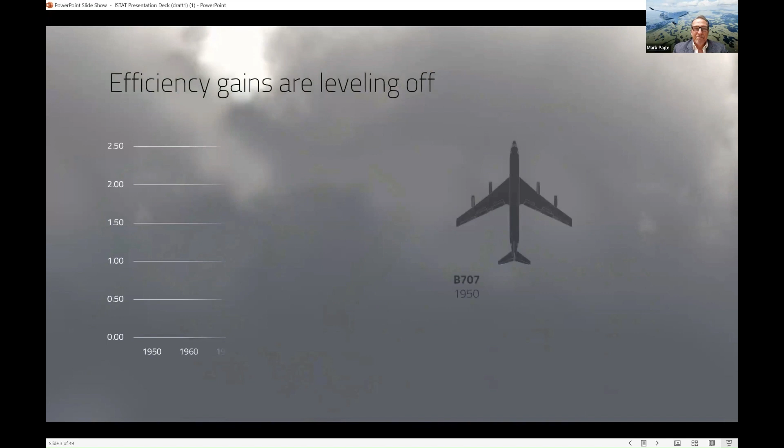But the preamble is this: the aviation industry has been doing a great job reducing fuel consumption over the decades. The interesting bit is that if you go back to 1950 and look at the 707, the first biggest successful program right after the de Havilland Comet, which was the first jet airliner, this species was formed: swept wings, podded nacelles, cylindrical fuselage, and an empennage. As you see, over time, that hasn't changed. The species of the airplane hasn't changed. Most of the benefits you see on the left were actually engine-related benefits.

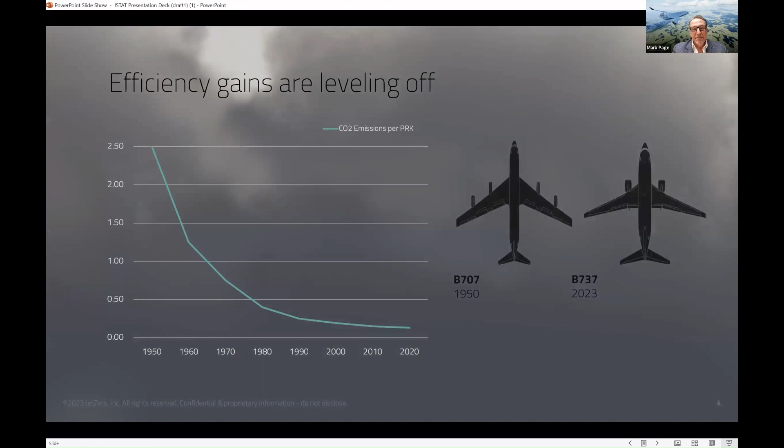So what can we do? Well, we have a proposition with this airplane to achieve a 50% reduction in energy consumption, and that goes along with a 50% reduction in CO2 and water vapor products as well. 50% is a bold statement. That is saying a lot. Hopefully you will see, as we share some of this work, why we feel so bullish about the technology, why the folks at NASA and the Air Force, after vetting our work, also see these benefits in the future.

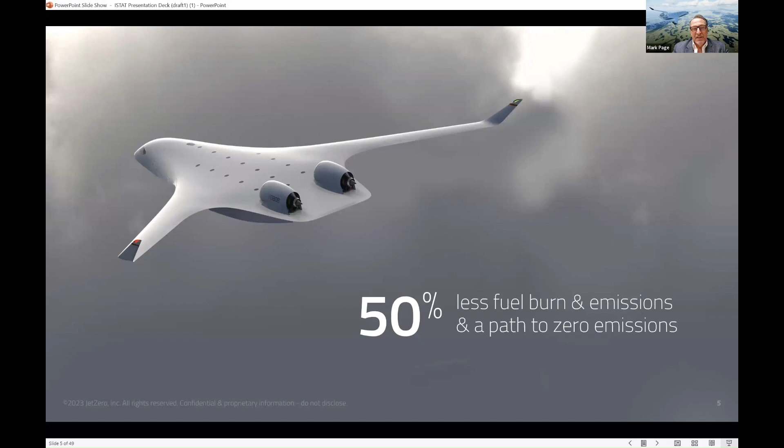And I'll start with talking about the structure of the airplane. Let's look at a tube and wing. On the top, I'm showing the lift carried by the airplane. On the bottom, I'm showing the weight distribution. If the blue and the yellow were equal and opposite, wingtip to wingtip, then in theory, you don't need structure. Everything will stay in its place.

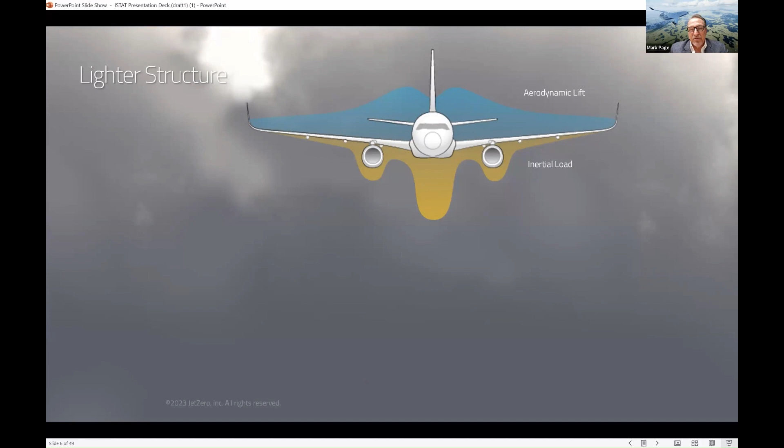Of course, you do need structure because those shapes change over time. But nonetheless, the amount of structure I need depends on how dissimilar those shapes are. Any place where the weight is concentrated and the lift isn't lifting it and canceling it is going to make big structural bending moments, as we call them, and shear stress. That results in the need for thick skins in the wings and big webs.

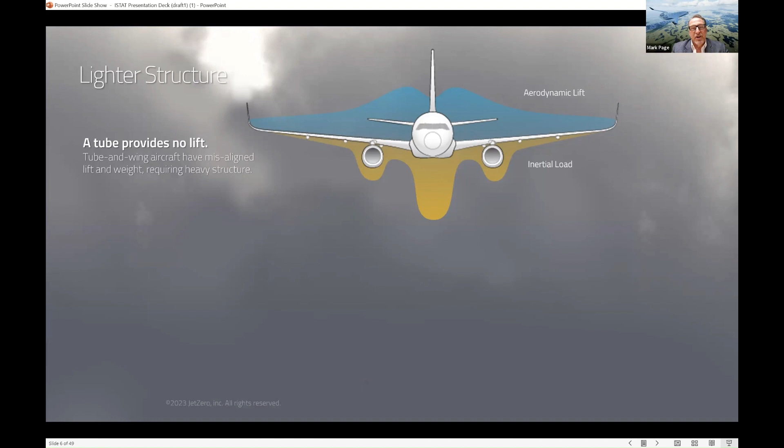The airplane, of course, with the tube and wing, there's some carryover lift on the fuselage, but the fuselage itself doesn't make lift, so it distorts the shape of the lift distribution. The blended wing solves that by simply being a continuous airfoil from wingtip to wingtip, and we also distribute the mass in a very favorable way. When we do that, the stresses on the airframe from wingtip to the middle are much reduced, and the airframe can be very, very light.

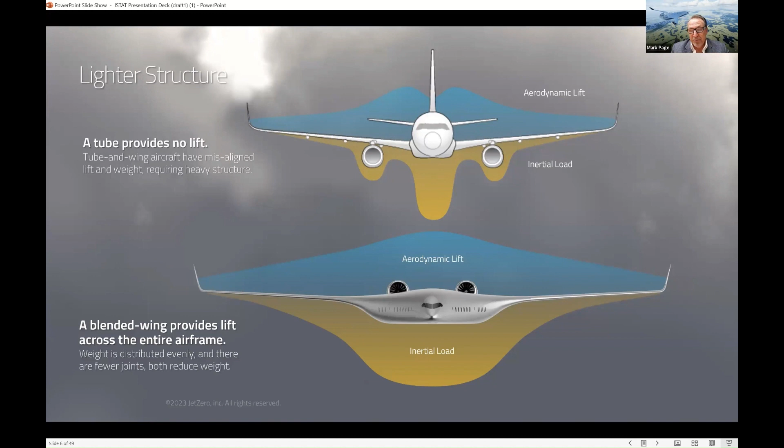But there's another part to the blended wing story. If I look at a tube and wing airplane above, clearly the fuselage carries the passengers, the engines make the thrust, the tail keeps it stable. Why does the tail keep it stable? Because cylindrical bodies are profoundly unstable. That's a huge disadvantage of tube and wing airplanes - they need a giant empennage to compensate.

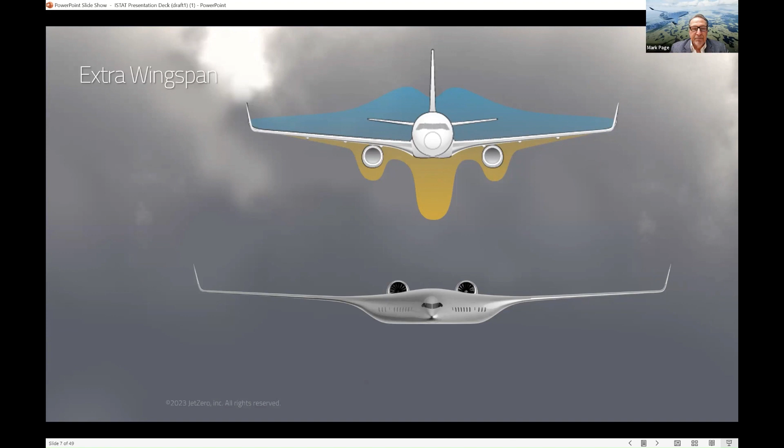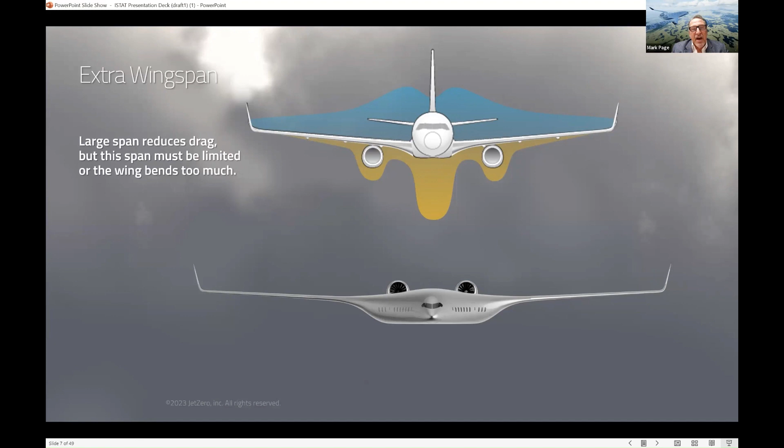Nonetheless, the airplane we've evolved has been a very successful configuration, a very successful species. One thing you'll notice is I've got rather slender wings and a big, deep fuselage. That wing's slenderness is limited - I can't just make it longer and skinnier forever because it flexes too much. It becomes not a strength problem, but a stiffness problem. So the outer wings on airplanes today have gotten about as long and skinny as they can get.

What the blended wing does is change the fuselage into a lifting shape to continue that lift from wingtip to wingtip, pushing those slender wings further outward. Now I have significantly less drag due to lift.

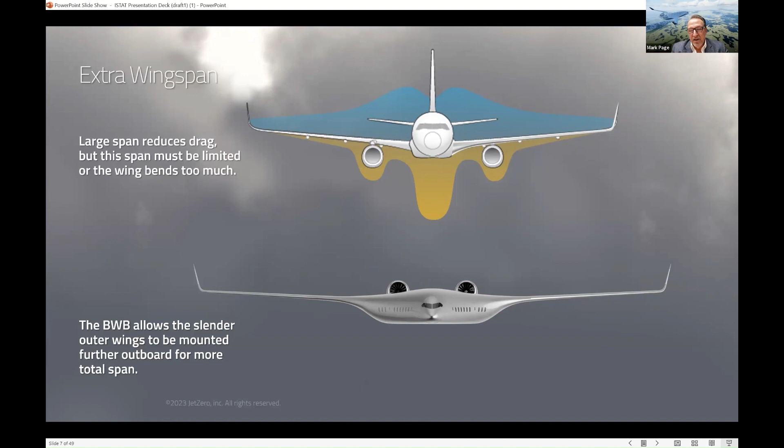The interesting thing about this market space, as most of you are extremely familiar with - if I looked at the worldwide global fleet and plot that against the capacity of that global fleet in seating, you get a really interesting curve. Dark blue is single aisle aircraft, the lighter blue are twin aisle aircraft, and you've got this interesting discontinuity somewhere around 170, 180 passengers.

What's going on? Well, the first thing that has to be said is in the middle there, those airplanes are in the process of vanishing. 757s, A300s, 767s - those airplanes and airplanes in that passenger capacity range haven't been introduced as new aircraft for decades. And so it's created what we call the mid-market gap. The airplanes still in the fleet today will soon be gone in that area, around 210 passengers or so on the other side.

So that is the so-called mid-market gap, and it's created this giant spike in demand for everyone trying to get in. Everyone's buying the beachfront property, but they can't get into the pool. That's the gap that we intend to address, and we believe that demand is going to be extremely high once that market gets served again.

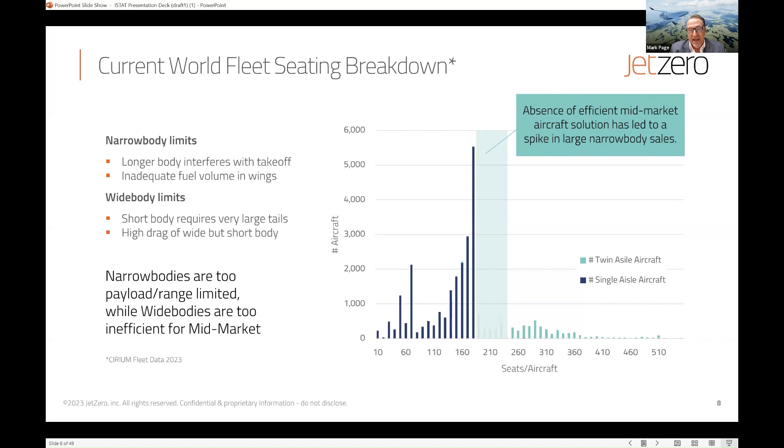But as you know, the mid-market gap presents a couple of real challenging problems. One of them is that since no one's been working on new aircraft for that segment, no one's also been working on engines in that segment.

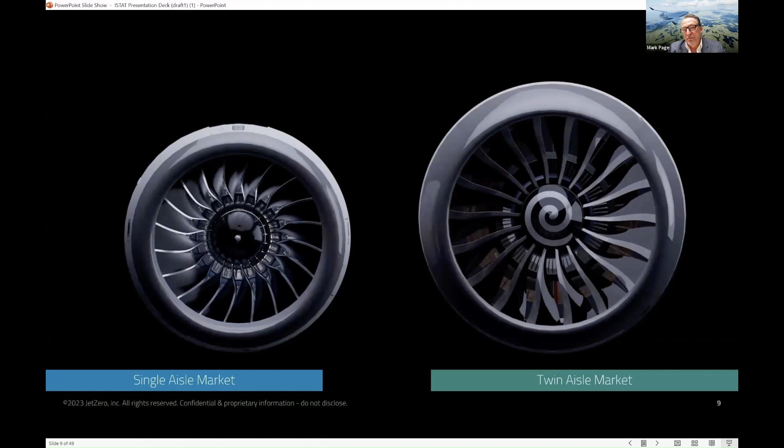So we have on the left a traditional narrow body engine - maybe it gets up to 34,000 pounds of static thrust. On the right, the next closest engine is about twice that thrust - a modern engine available today is about 64,000 pounds of thrust. There's a gap in the engines too, and that has been a barrier to the OEMs introducing the so-called mid-market airplane. They would have to make a new airplane and a new engine.

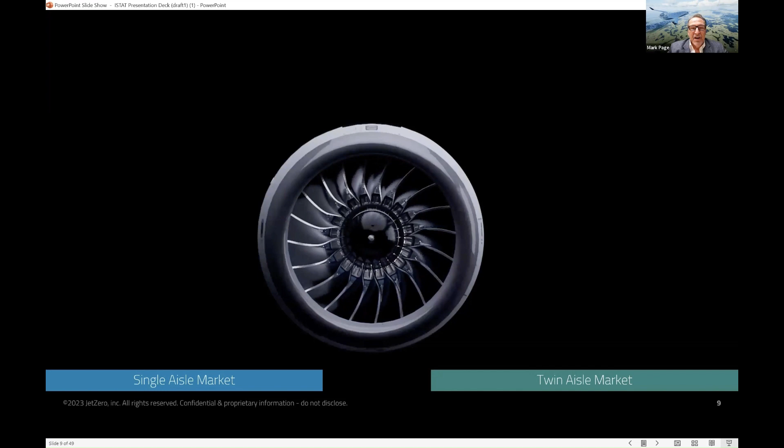What we've done with the efficiency of the blended wing, we've reduced the demand on the engine to about half of what it would be for a mid-market airplane that's a tube and wing aircraft. When that happens, suddenly the advanced LEAP and Pratt & Whitney GTF engines are perfect fits for this mid-market mission, and that problem is now gone away. I can have off-the-shelf engines that are mature and getting even more mature, available to serve that market. That's a big change in what it means to the world.

The airplane is going to be very conventional in some ways - in other words, how it fits into the market, it's going to fill in space that's been long empty, but it's just an airplane. It flies around 0.8 to 0.84 Mach, it's going to have typical mid-market ranges and typical mid-market capacities. When a pilot jumps into it, strangely enough, though it looks different, it'll be very familiar - the displays, the controls, the procedures are all going to be the same. Jetways, ground equipment, all that stuff will be the same.

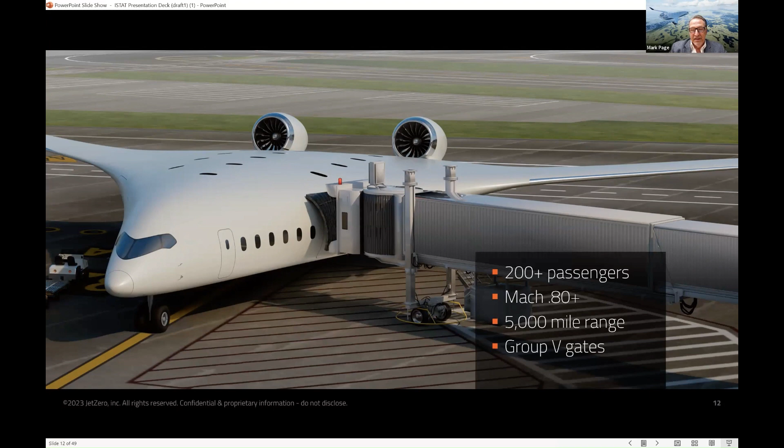So when we bring an airplane like this to the market, what do we think passengers are going to say? What's going to be the reaction? We've been working this for a long, long time.

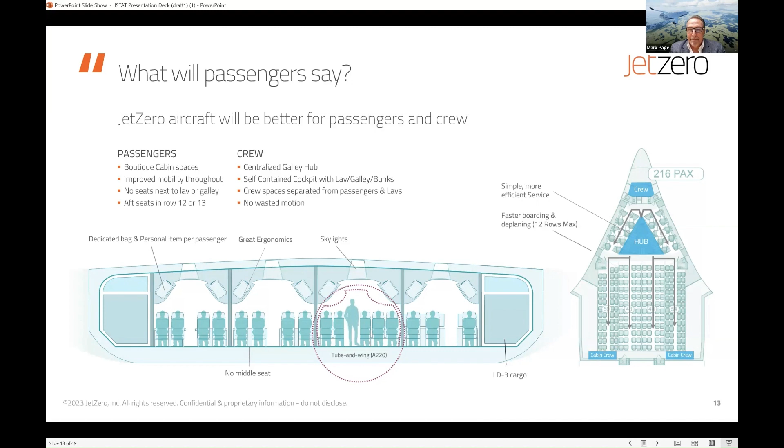We often get questions about emergency egress, and that's a great question to ask. We have 6 major exit doors on the airplane at the top, very much like a competing tube and wing aircraft. Most tube and wing aircraft also have perhaps 2 doors over wing. We don't need over wing, so all the doors, everyone will exit the airplane without having to climb up and climb through a window. Every exit is a door.

Because we have such a short main cabin, look at that, it's only 12 seats long. That means the time it takes to load, unload, or make an emergency evacuation of the airplane is much reduced. Everything you can measure related to how people move around in airplanes - average boarding distance, how many seat crossings, which are the things that slow you down, and how far am I from the emergency exits - on average we have very significant improvements on all of those things.

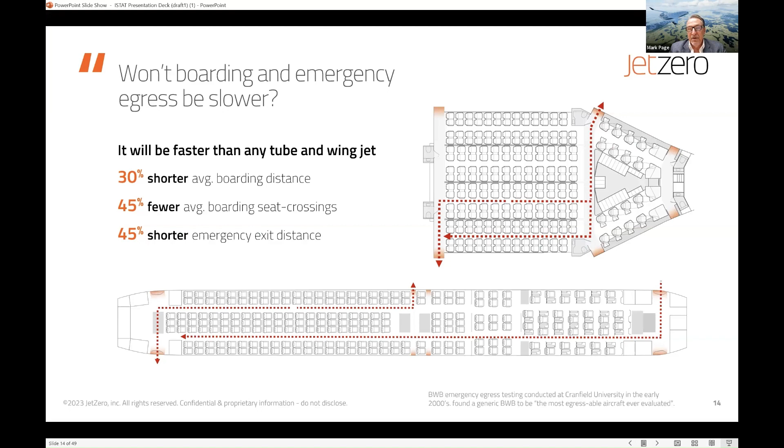Research in England with a full-size, much larger blended wing body concept declared it the most egress-able airplane ever tested by Cranfield University. So there's a lot to recommend the airplane in terms of emergency characteristics and qualities.

Let's dig a little deeper into this fuselage question and how the fuselage is constructed. If I look here, class leading A220, lovely interior, and I think it's the favored interior of all aircraft right now in ratings. We're, of course, doing something different.

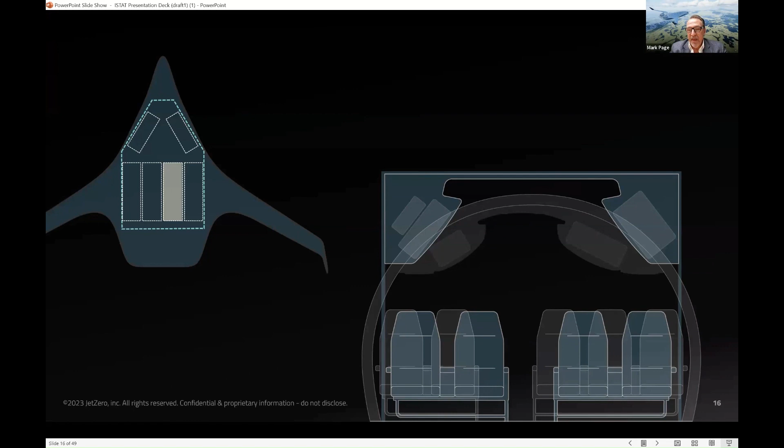We have vertical sidewalls. We're looking at a 4 abreast seating arrangement. Our ceiling is higher, and look how much further out and up I can put the luggage compartments. So now it's a clear way for you entering and leaving the airplane and putting your luggage up there, and for the staff on the airplane, it's a much more usable open space.

So the airplane - again, looking at the total cross-section of the airplane with these individual bays, 4 abreast seating. The beauty of this arrangement is that there are multiple benefits, but the vertical sidewalls allow us to add over 50% more overhead baggage volume.

Anything you bring aboard, there's room for. With the 4 abreast seating, we can actually assign half of the rack above your head to you and your seat number, and the other one to your partner there. Everyone gets a seat, a dedicated baggage storage space on the airplane, numbered to your seat.

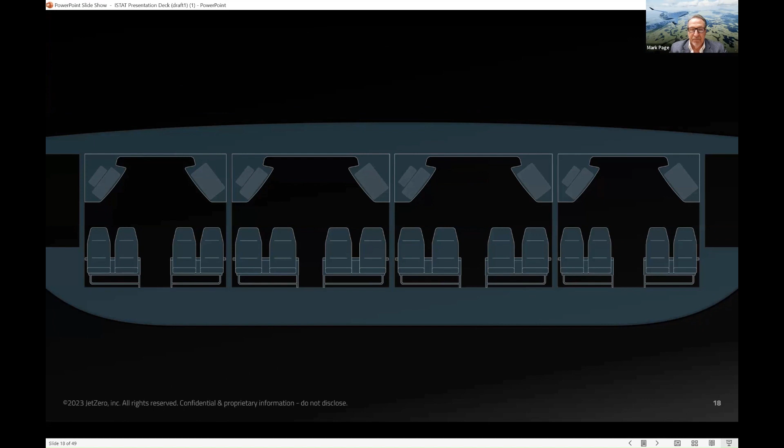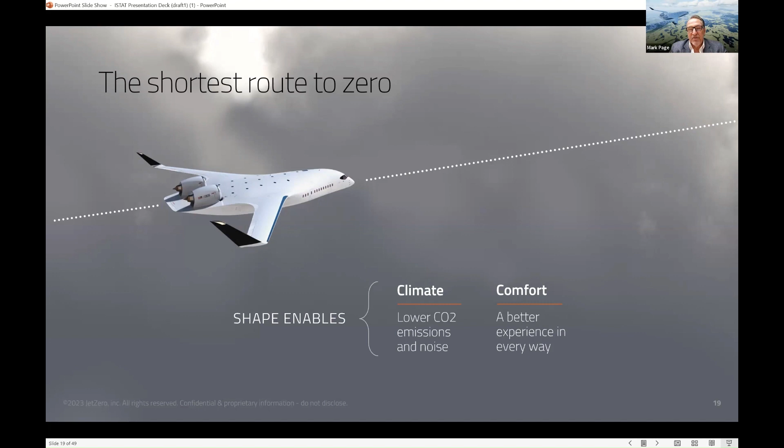So shape enables so much. This new species, this new shape of airplane is opening up not only things related to climate because of the efficiency of the airframe, and we'll talk more about how quiet the airplane is, but we're also going to be making a major step change in comfort because the sidewalls are vertical, the bag racks are much further from the seated passengers. They have much better head clearance, and they're very accessible from the center aisle. The 4 abreast cabins are wonderful, no middle seats.

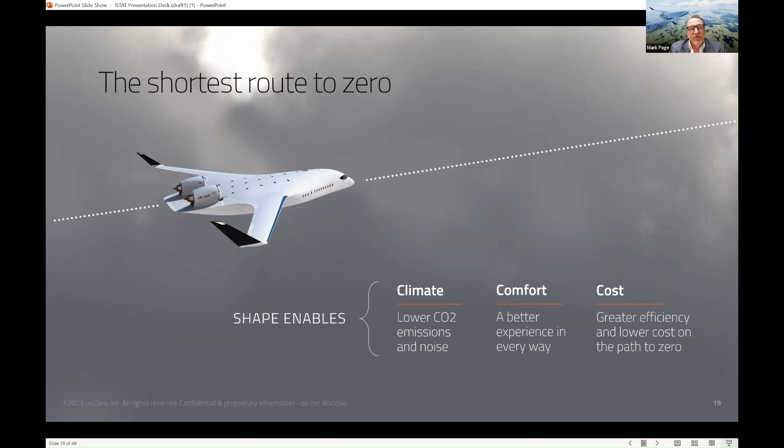In terms of operating cost for the airlines, this efficiency obviously is going to have a significant advantage. But not only that, we are providing a path to zero emissions with liquid hydrogen. This work has been studied, blended wings, for a long time. I was there at the birth of the modern blended wing.

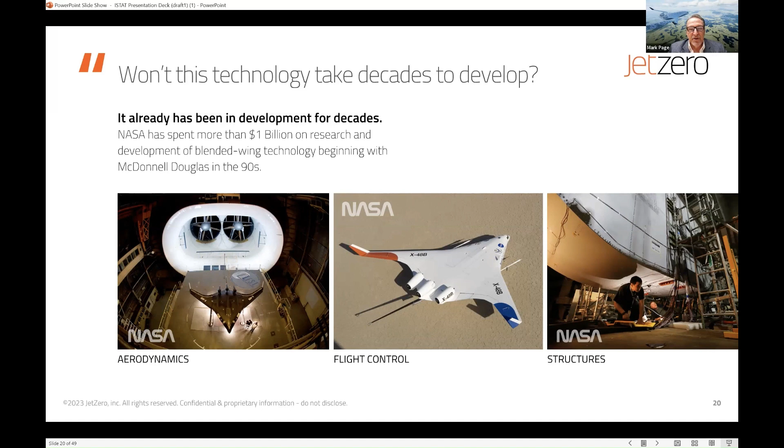Flying wings have been around a long time, but this isn't just a flying wing, it's a very different thing. There have been other antecedents that presaged where this was going, but the actual blended wing we're talking about was created in 1990 by the folks here. Bob Liebeck was the first person to pen the general concept of having a concentrated payload compartment, not more so fore and aft but widened, and what that could offer to the airplane.

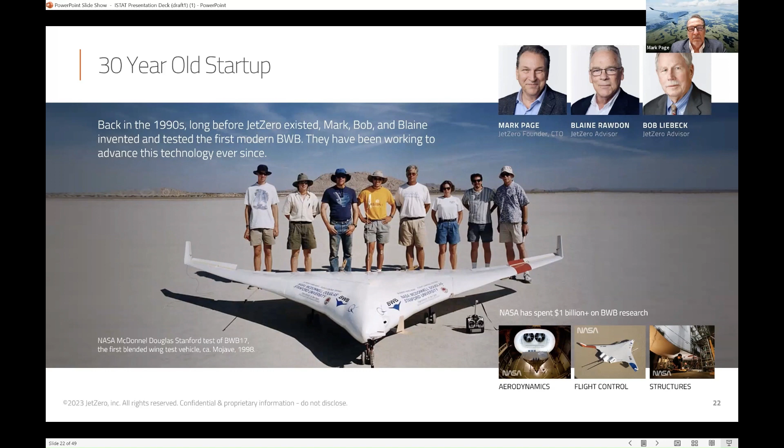Many years ago, when we were all a lot younger, we were flight testing the airplane concept to evaluate its stability characteristics, and we did so with NASA sponsorship, a very successful test program. And that has led us to this blended wing airplane that offers fuel efficiency. But the surprise was all the other things that it offers.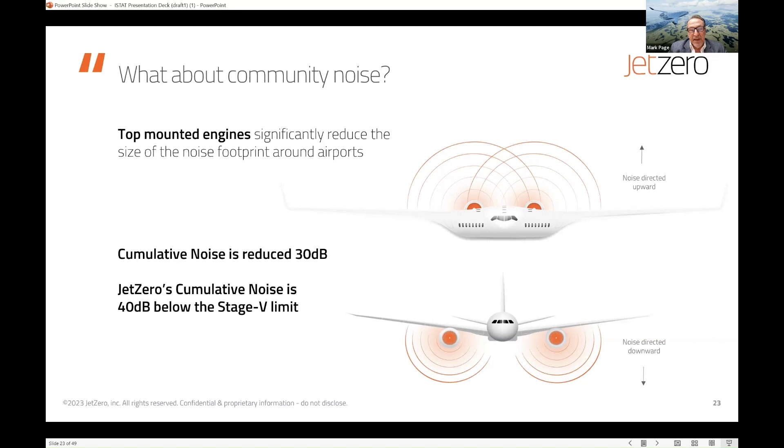This is a good example. When I look at conventional aircraft with the engines mounted in front of the wings and below, when I'm taking off and landing with my flaps down, the bottom of the wing and that flap focus the noise on the people below. With the blended wing, the top-mounted engines mean virtually no forward-radiated noise gets to anybody. That's all reflected up, and the jet noise is not being amplified by a flap presence when it's reflected down. We're seeing a huge reduction in noise, 30 dB overall reduction compared to a tube and wing, and 40 dB below the new stage 5 limits.

So why are we saying 50%? Haven't lots of studies in the past shown that a blended wing is worth maybe 30%, but often 20%? Why are we claiming 50%? What's different? To get a change, you have to make a change.

The change we made from the historical blended wing that I first worked on back at McDonnell Douglas with my colleagues was to go to what's called the single deck. The original blended wing, on the bottom left, had a double deck. The lower deck carried cargo and had leftover space to put the landing gear. But we wanted to make an airplane in the mid-market that was smaller than anything we'd looked at in the early days of blended wing research, and we wanted an airplane where we could remove one bay and make the airplane smaller to be a true single aisle competitor and be efficient in that space.

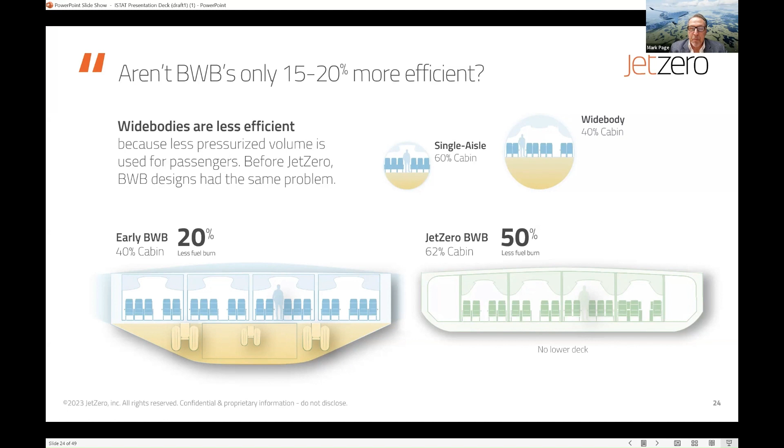But this created a problem. If I wanted to have an airplane with no lower deck, where do I put the landing gear? In the darker blue, you see a traditional tricycle gear on an airplane, and what you see is that the main gear are pretty darn close to the center of gravity, the center of balance of the airplane.

That allows the airplane to rotate nicely and easily for takeoff. So I could pitch the aircraft nose up, get the lift I need for liftoff, and I could do so by pushing down on the tail surfaces with a modest amount of load. Now that works great for an airplane that is a tube with a long tail arm, more like pushing down on your lawnmower to make a turn. What if you had to push down on a shopping cart to make the turn? That's tough. Well, with a single deck airplane, that's what we had created.

We moved the landing gear aft. Why would we move it aft, you ask? Well, it was empty space, unoccupied. That's cool, but it's not the right place for kinematics of takeoff. We had to have something to address that. The other thing was that moving outboard was not possible because of the airport limits in wheel track. So to stay under the 9-meter limit and be qualified when we shrink it as a single aisle aircraft mission, we couldn't have the landing gear outboard, and it actually wasn't very efficient to stuff them there because it was stealing beautiful, irregular volume that's useful for fuel. So we moved the gear to the back. We had to add a trick, which I'll show you.

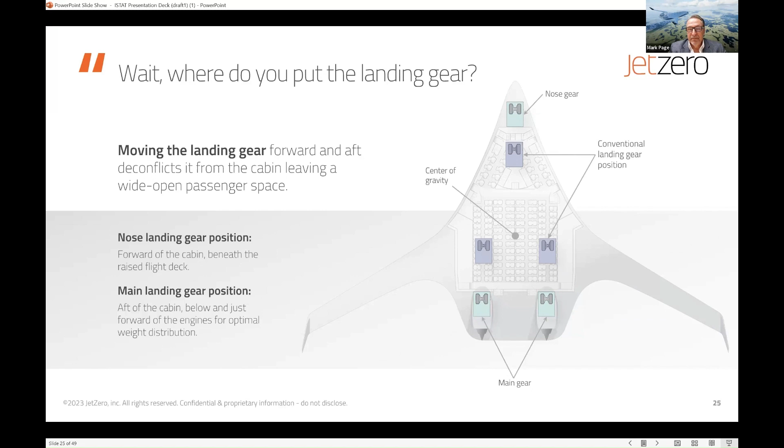The trick is this: the main gear and the nose gear are linked. They have a simple mechanical link, could be hydraulic, could be cables, could be anything else. But when I pitch, the airplane is free to pitch about its balance point. The airplane can't go higher or lower; the landing gear resists that. But once I unlock the landing gear, if the pilot pulls aft and there's airspeed, the nose will come right up with a very low download. And then something interesting happens, which is that we unleash the benefits of the body for takeoff and landing.

And if you take a little look at the little picture of me on your screen, I'm going to show you something here. Oh, this won't work very well. I apologize.

I just realized that the background filter is going to prevent me showing you that.

In any case, if you have an airplane with a big triangle in the middle and you pitch it up, that triangle of airfoil becomes my high lift system. I don't need flaps, I don't need slats. All that stuff I get to throw overboard. A light load pushing down on the wingtips at my ailerons plus elevators can do the trick to rotate the airplane.

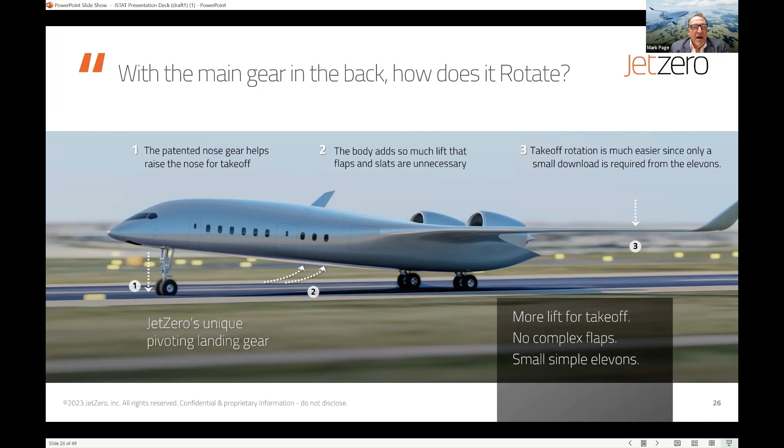The other thing folks often ask about with this airplane is, your winglets look like fins, but they're so tiny. How does the airplane fly straight, and how do I turn it?

If you look at the top, you'll see that we have an airplane which can create a very large yawing moment left and right by opening the controls. Instead of making drag like the B-2 bomber on an outer wing control, we do it like this. It's a very quiet and, from a control standpoint, linear, smooth way to make drag.

If I do it on only one side of the airplane, I can yaw the airplane for crosswinds, or to compensate for engine out. But the full span controls also allow me to do ride smoothing and all kinds of gust alleviation. Because we have made them into small segments, we can control them to do much more than you've ever seen before on an airplane.

We have flight controls across the whole airplane span. So gusts and turbulence and all those things, the flight controls can reject those excitations very nicely.

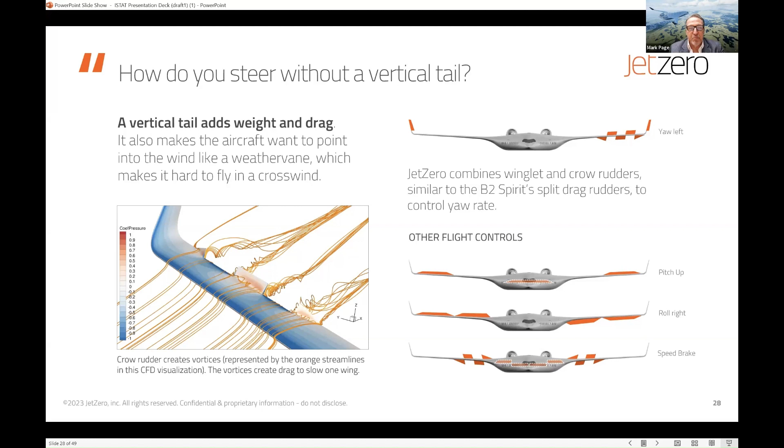In talking about flight controls, remember I mentioned how unstable fuselages are for tube and wing aircraft. Well, the empennage is what compensates for that. We don't need any of that stuff because we don't have this big cylinder that's so unstable.

But as I said, we also don't need slats or high extension flaps. All those rollers and jack screws and differential sensors to make sure things are symmetric are just gone. All the failure modes are gone, the cost of it is gone. But in addition, we don't need spoilers because we don't have high extension flaps, and we don't need the spoilers to dump that lift when we take off and land. So we're in a very great position for an efficient airplane.

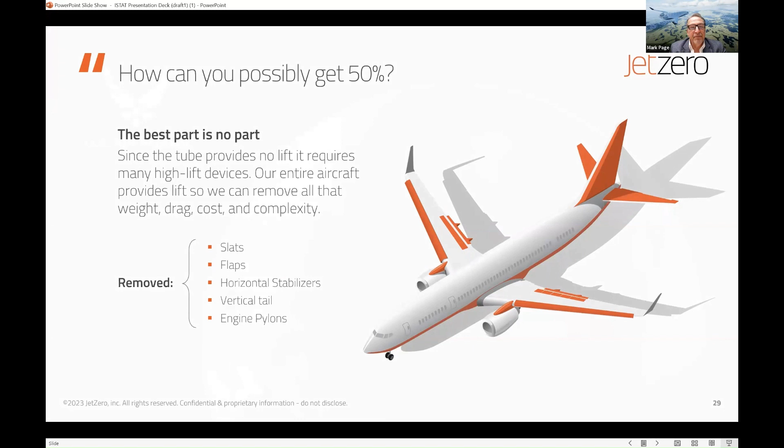Now, the Air Force has taken interest in this because of its range possibilities. What they would like to look at is, they want to get into Pacific range performance, which is really not very easy to do today.

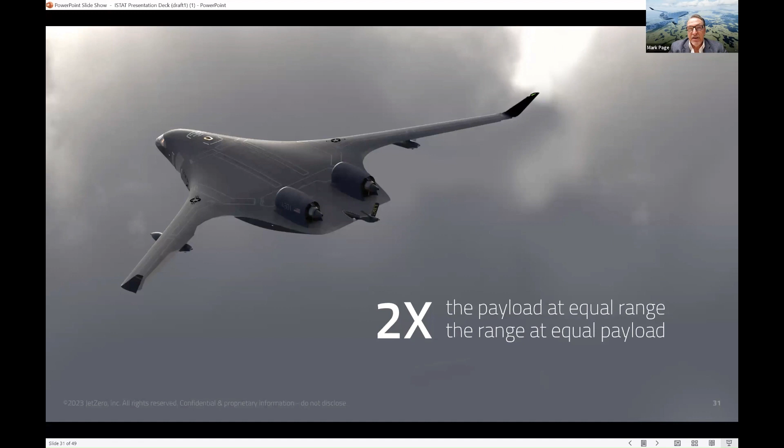And so we've prepared for the Air Force an estimate of what this airplane could deliver, and it's remarkable. So I can double the range of the best tanker out there right now, which is the KC-46. I can double the offload of fuel at a common range or radius, or I can double the radius at a common offload.

So this is what has brought the airplane front and center to the Secretary of the Air Force, Frank Kendall, who, along with the broader Air Force team, selected us to develop a prototype of the airplane that is actually going to be a commercial jet transport. So they're actually funding us to make sure that we're successful in getting a commercial launch of the product.

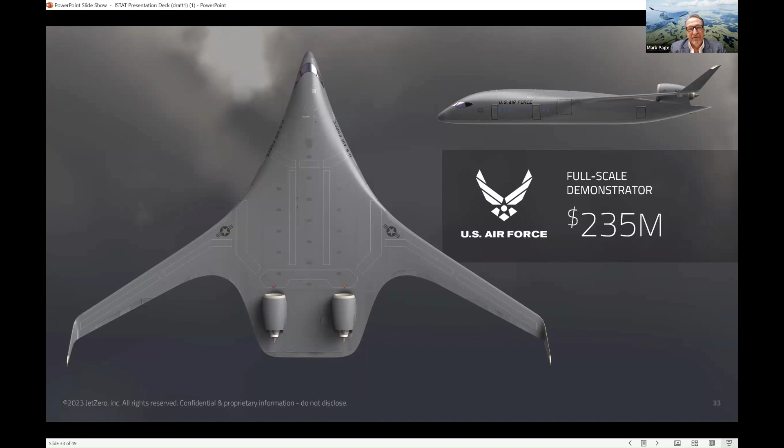That award is nearly $235 million, and it's going to result in 2027 in the first flight of a full-scale manned flight demonstrator that can do the mission of a 767 or a small 787 with single aisle engines. That's going to be a very exciting program and is going to be very definitive proof of these performance claims.

The airplane in many ways is going to be just like any other airplane. We're still going to have belt loaders, lift loaders, and we're still going to be using LD containers, LD2s, LD3s, and so forth. As far as the operator goes, it's just another airplane. We do have left and right instead of fore and aft loading compartments, but otherwise, that's it. That's the difference.

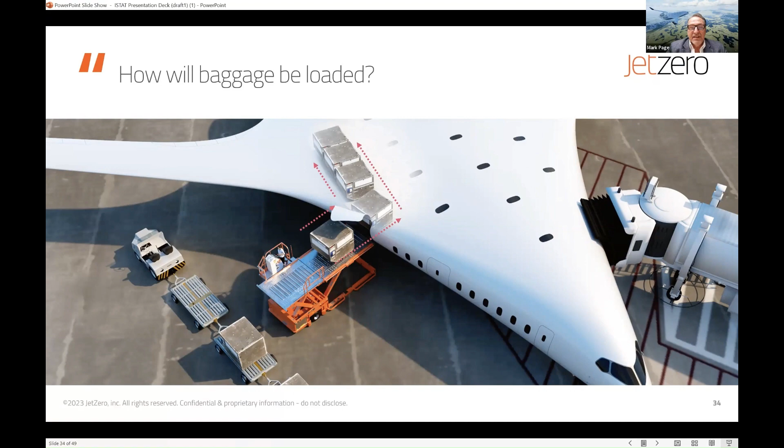So what we're looking at is a multi-mission platform, one that can be a jetliner, a strategic tanker, and also a commercial freighter. And once again, it is something that will replace all the airplanes that are vanishing in the middle, that will be soon completely gone, large 767 size.

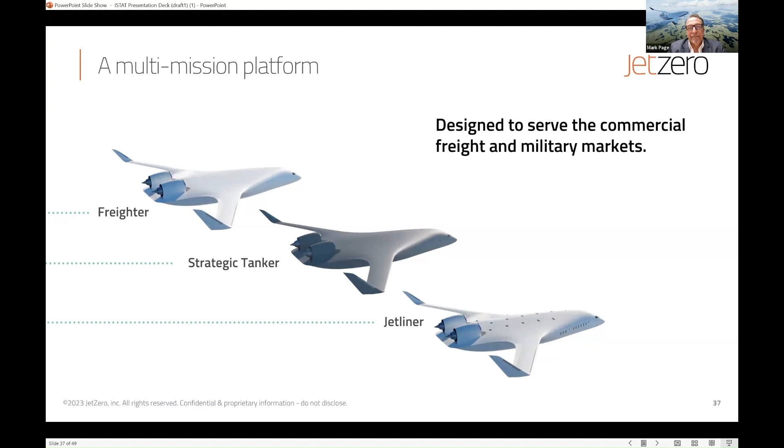And that's going to allow us also, because of the way the airplane has such usable volume, we're able to take the airplane, and in the future, when we get to liquid hydrogen supply being available, we can change the airplane by devoting 2 of the bays to that high volume liquid hydrogen, 4 times the volume demands of the same energy of Jet A. So you really got to find a lot of volume, and a blended wing delivers it.

And then this 255 passenger, 5,000 nautical mile airplane becomes a 180 passenger, 4,000 nautical mile airplane. So it's a very capable jetliner in its own right, and far greater performance is achieved than any of us have ever heard of for tube and wing aircraft that are struggling to find a way to incorporate that extra volume into the airplane, because the fuel can no longer be in the slender wings.